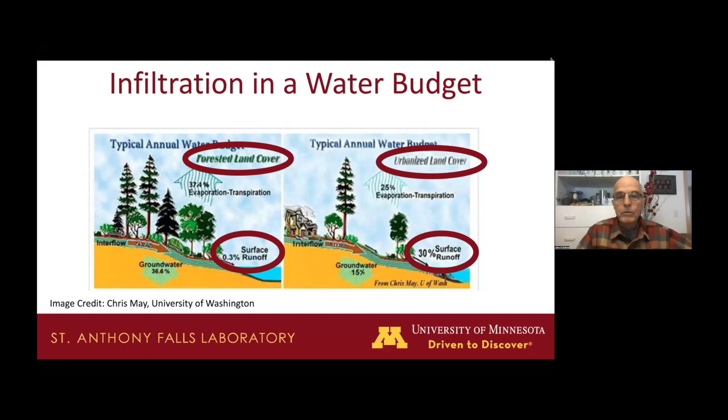So you have 30% surface runoff with an impervious and urbanized land cover. That's a factor of 100 difference from a forested land cover to an urbanized land cover. That's the source of our problems in managing these types of things.

So what can infiltration do for us? Well, the first thing it can do is reduce combined sewer overflows. It's not a big problem in Minnesota, but it is a big problem in many cities in the United States, especially towards the East Coast.

A big problem in Minnesota, because we have so many lakes, is we also have pollutant loads to these lakes. Lakes sitting there, it has pollutant load coming in. We need to take care of that pollutant load going to our lakes and our rivers. It reduces the pollutant load because it reduces the water and the concentration that comes with it.

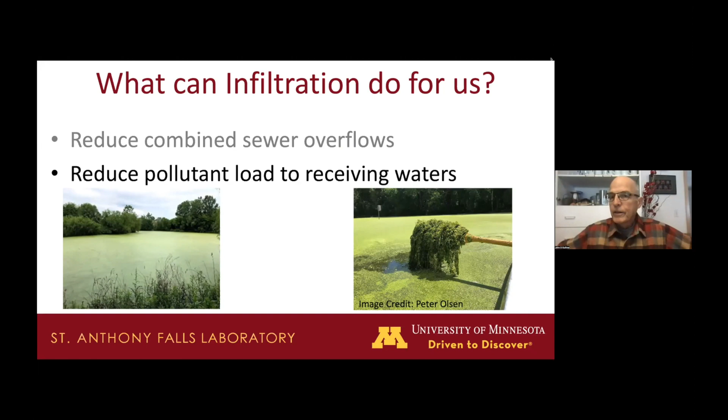A third impact is you can reduce the impact of extreme precipitation events. I did a research study with Trisha Moore and found that increasing infiltration practices reduce climate change adaptation costs by 50%. The reason for that is you can put in a lot of surface infiltration practices

instead of going underground, which is very expensive. If you're going to have pipe upsizing or underground storage chambers, that costs a lot of money. You can do a lot of surface infiltration instead.

But there are caveats to building infiltration practices. The main caveat is roughly 30% of infiltration practices fail on day one. That's kind of the history of infiltration practices.

The reason is a lack of infiltration measurements. People put something in and assume that it's going to infiltrate. There is construction compaction, which can stop infiltration, basically stop it, and plants that don't grow.

The plants open up the pores. Construction practices, construction compaction closes the pores. It makes a heck of a difference.

So the question is, can you use soil texture tables to decide - if you take a borehole and see what's down there - can you use soil texture tables to decide whether or not you can infiltrate water? The problem with soil texture tables is they don't talk about soil structure.

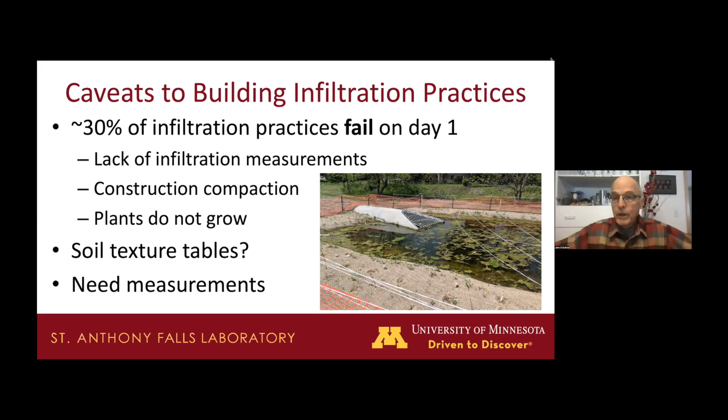So how do you determine infiltration? Well, the most important soil parameter for infiltration rates is saturated hydraulic conductivity.

We have a graph here on the right, infiltration rate versus time. The time could be minutes if you have sand or sandy loam, or hours if you have clay. You start with a high infiltration rate at time 0, but it goes fairly quickly down to something that's close to your saturated hydraulic conductivity. So it does set a minimum for your infiltration rate.

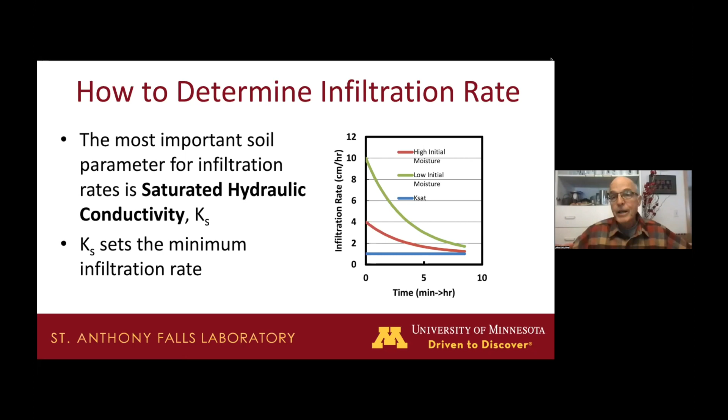I'm going to talk about 3 measurement techniques. We've been working on these measurement techniques for 20 years. We've recently been comparing them in a project for the city of Minneapolis.

The first is water level measurements after precipitation events. It sounds like a natural. It rains, you see how it fills up, and you see how fast the water disappears. Pretty simple, except it ends up being complicated in practice. I'll show you that. The second is synthetic runoff testing.

I like synthetic runoff testing. You do it under dry conditions, controlled conditions. You watch the water drain. The third is point infiltration measurements with infiltrometers. I'll talk about that as well.

So for the city of Minneapolis, we're doing water level measurements after precipitation events. We're actually comparing these 3 techniques.

It costs about $5,000 per site, so you need a fairly large site to do this. The reason it costs $5,000 is you have high equipment costs. You have to leave the equipment in there. You have to know what the rainfall is. You have to leave the equipment on the site to get enough data so that you can analyze it. The equipment doesn't always work. Sometimes something goes out, misconnection of something, some sort of meter. So you have continuity issues because you don't have a full set of data.

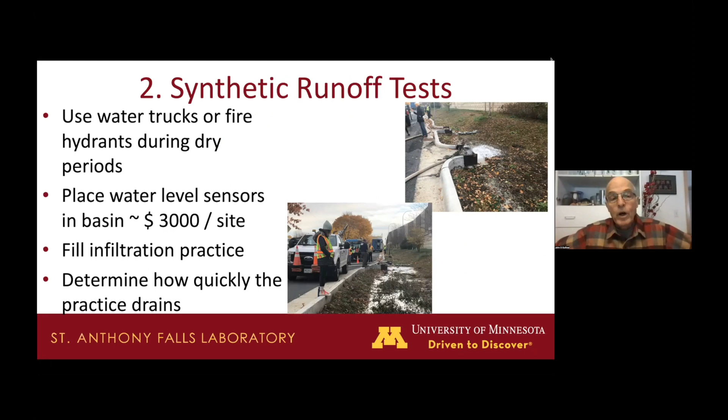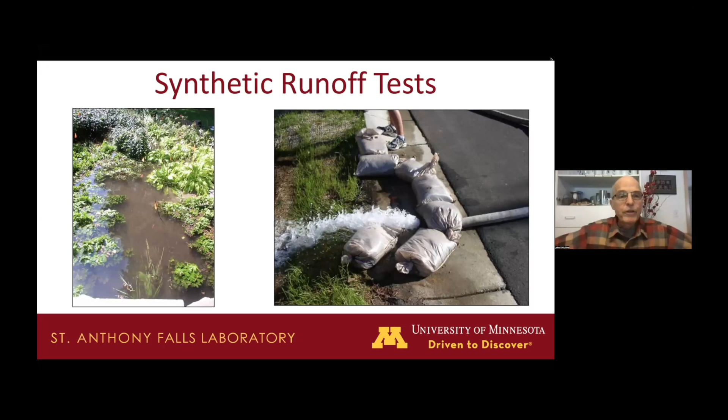Here's a synthetic runoff test at a rain garden that we did early on, 2005, I believe. We filled this rain garden and then watched it drain.

So if you want to know the saturated hydraulic conductivity, you can use this equation. It's mostly based upon the left-hand side of this equation, your original depth and your drainage time, but then the soil moisture and the soil suction comes into it right here. It has a certain impact.

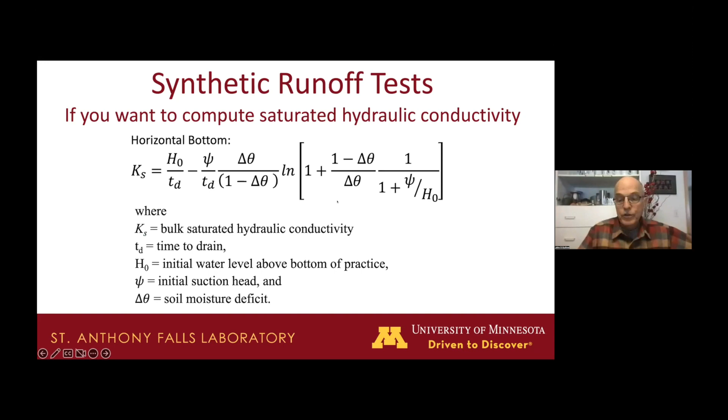The problem with synthetic runoff tests is that if you have too large of a practice, let's say a 10,000 square foot rain garden or a long swale, you can't get enough water to fill that up. It's difficult to find enough water. For example, the city will not let you run your fire hydrant for an hour because that is a problem for any fires that occur. Water trucks do not have that much water in them.

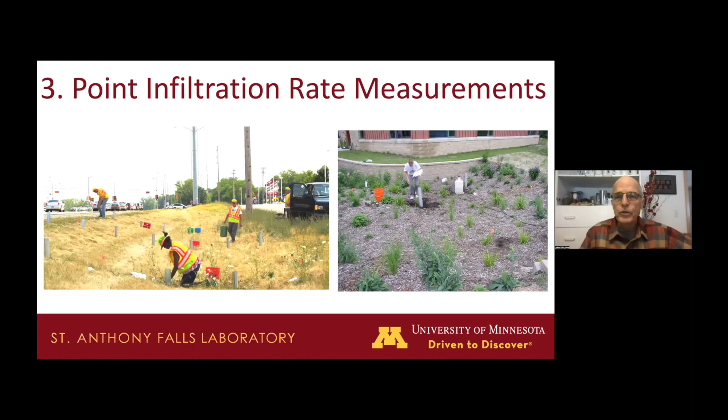Why do we take point measurements of infiltration rate? Well, that's the question. How many infiltration rate measurements do you need to take?

There are some studies that cover 2 to 2.5 orders of magnitude, which is still a lot. That means you need to take more than one measurement. If you take a measurement at one location and it happens to have a low infiltration rate, you'll assume you have no infiltration. If you take a measurement at a location with a high infiltration rate, you'll assume you have high infiltration. The truth is somewhere in between.

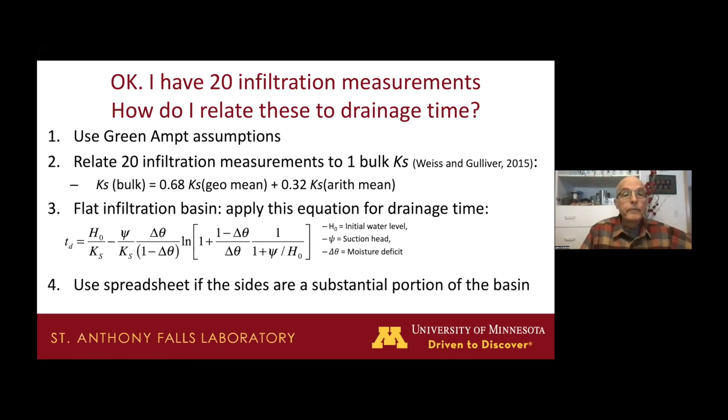So we've addressed the number of measurements. We found that it takes a lot more than we thought it would. That's why John and myself, along with Brooke Asleson and Rebecca Nestingen, developed the MPD, because we knew we had to take lots of measurements. And, you know, the double ring infiltrometer is a pain to use anyway. So you need approximately 10 to 20 infiltration measurements to characterize an infiltration practice.

The question is, how accurate are these things? How accurate are these infiltrometers?

So item 3B, is there bias in infiltration measurements? Again, there's the variability in the field. You cannot go in the field and determine the bias in infiltration measurements. We've thought about it, we've tried, it doesn't work.

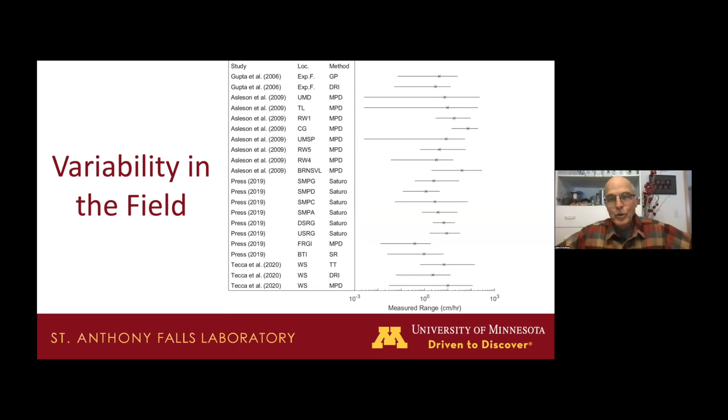So we did a numerical experiment on the computer. We take a soil identified with a certain hydraulic conductivity, certain soil parameters, a certain moisture, and put it into the computer. We supply our infiltrometer as it's used in the field, run the tests, and see how the measurement compares to the actual. So we have a measurement of infiltration rate with the infiltrometer, and we know the actual infiltration rate or actual saturated hydraulic conductivity in the soil.

We did this on 6 infiltration measurement methods, 7 soil types, and 5 antecedent soil moistures. So here are the 6.

A Turf-Tec infiltrometer is used at golf courses to see if they have to water. The modified Philip Dunne infiltrometer is something that we have worked on. The Saturo is a new infiltrometer developed by the METER Group in Washington. The double ring infiltrometer is the standard. The well permeameter is used to determine things like water reuse. And the pilot infiltration test is commonly used in Washington. It's actually a pretty large test.

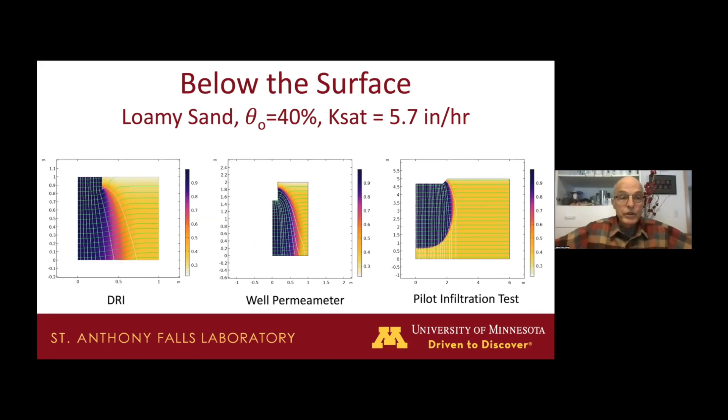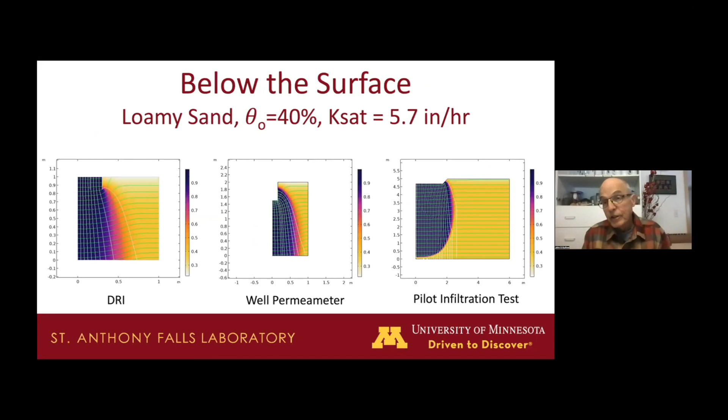So here's how they work on the computer. You can see these are the steady state techniques. They all assume a one-dimensional infiltration rate, but one-dimensional infiltration doesn't really seem to be happening here. It is two-dimensional, actually three-dimensional. The double ring infiltrometer, the well permeameter, and the pit test all have three-dimensional infiltration, but they all assume one-dimensional infiltration, so they should have some bias.

Here's what they look like after 6 hours, which is how long you're supposed to run these, 6 hours.

John, my apologies for the interruption. About 3 minutes, please. Okay, thank you.

I'm just about done. And this is what the other techniques look like: the Turf-Tec, the MPD Infiltrometer, and the Saturo.

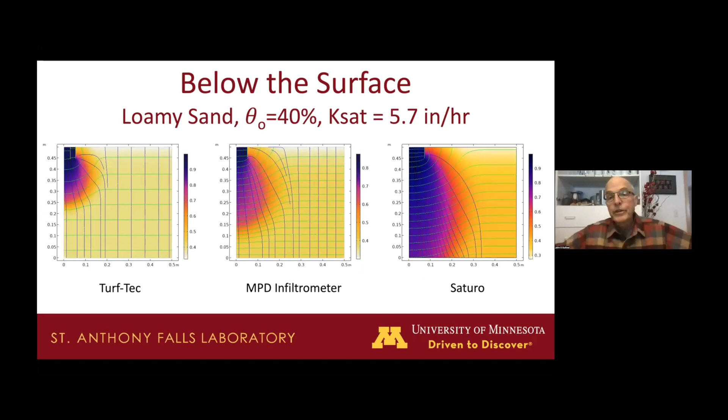So a summary of the measurements. A Ks measurement does not depend upon soil moisture. This is a good thing. If you have wet soil or dry soil, you get the same saturated hydraulic conductivity for all of the infiltrometers, except for tight soils like silty clay and sandy clay. There is bias, but it tends to be constant, meaning each infiltrometer has a certain bias. The exception is the Turf-Tec device, which doesn't really do that much in terms of the soil. It is really not accurate. We don't recommend it.

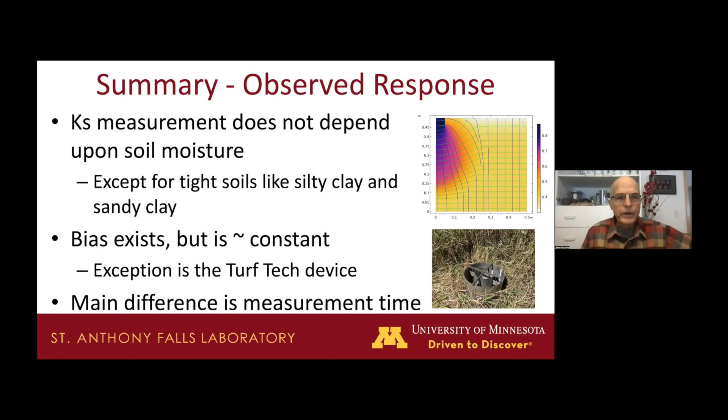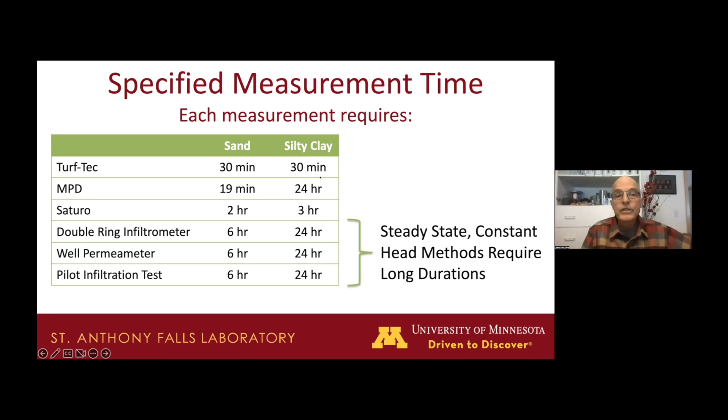The difference is how long it takes to measure. The falling head techniques are the first 3 here: the Turf-Tec, MPD, and Saturo. The double ring infiltrometer, well permeameter, and pilot infiltration tests are steady state techniques. You have to wait at least 6 hours to get steady state; that's the requirement. These 3 here can be as low as 30 minutes, 19 minutes, and 2 hours. For most of our infiltration practices, that's pretty close. If you go to the clays, then they can take longer, especially the MPD.

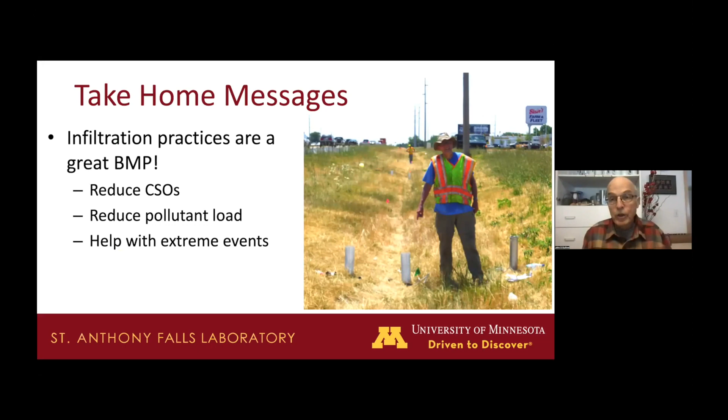So some take-home messages. Infiltration practices are a great BMP because they can reduce combined sewer overflows. They reduce pollutant load to your receiving water bodies, and they actually help with extreme events. But we need to measure the infiltration. We can't just take it off of a soil texture chart, because soil texture is only part of what causes a rapid or slow infiltration. And there's roughly a 30% failure rate due to poor infiltration, which was uncharacterized.

So synthetic runoff tests, I like those the best. They're the most accurate, and they are relatively inexpensive. If you cannot do synthetic runoff tests, then you need to measure infiltration with point measurements. To get within a factor of 2, you need 20 measurements; for a factor of 3, 10 measurements. It depends upon how important it is for you to get accurate infiltration measurements.

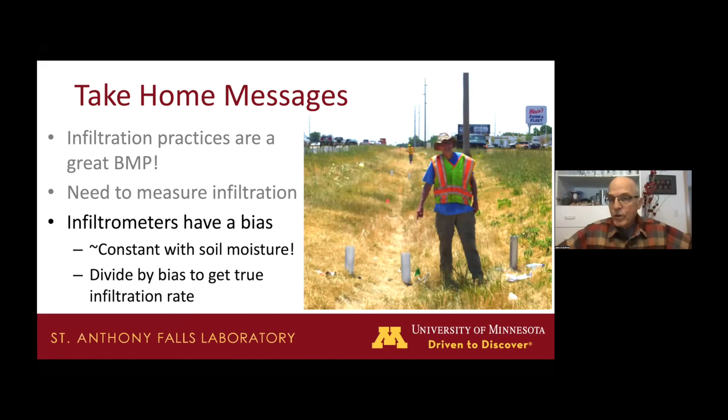Infiltrometers have a bias, but we figured that out. It's constant with soil moisture. It doesn't change when you change your soil, and you just divide by the bias to get your true saturated hydraulic conductivity and get your true infiltration rate. And we recommend the Saturo and the MPD because they take less water, less time, quick installation, and you can take lots of measurements. So that's my talk.

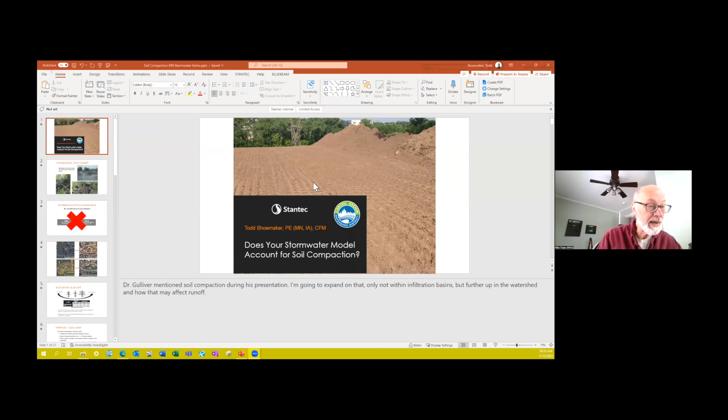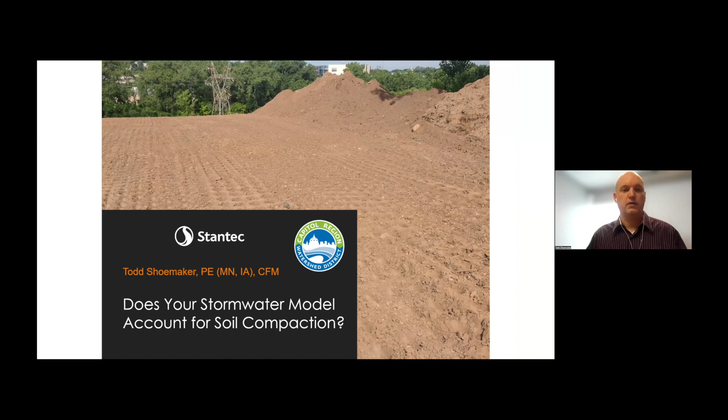Dr. Gulliver just mentioned soil compaction during his presentation, so I'm going to expand on that a little bit, not only within infiltration basins, but further up in the watershed and how that may affect runoff. Accurately determining post-construction runoff is critical to long-term watershed management. Increased runoff rates and volumes lead to incised streams, more sediment in the water column, and increased localized flooding. If we don't accurately predict runoff, we can't properly size downstream mitigation measures.

So let's talk a little bit about modeling and computer modeling, or as some of us like to call it, the curve number game. Curve number method is from the NRCS, and it's a widely accepted method for calculating runoff. It includes relatively simple equations used to calculate the amount of runoff from a rainfall event. Curve numbers range from 30 to 100, with larger numbers indicating a larger runoff potential. The lower the curve number, the more permeable the soil is.

And curve numbers are assigned based on soil properties and then classified into what are called hydrologic soil groups. There's A through D. So A are sands, and they represent a lower CN or less runoff. And then hydrologic soil group D are generally clays, and they have a higher curve number or more runoff.

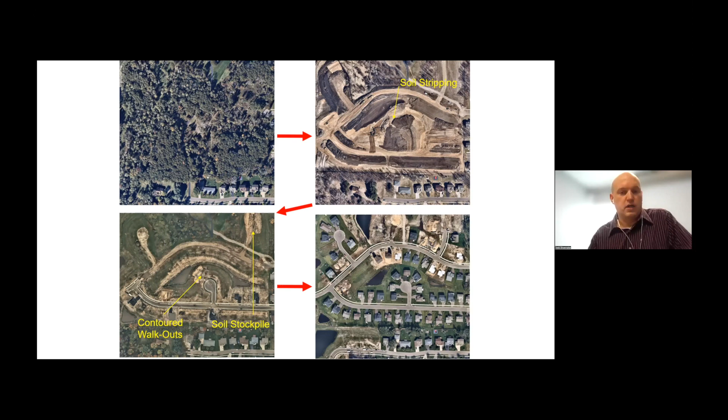This is a subdivision that went from undeveloped in 2016 through near completion in 2019. It's generally accepted that construction activity reduces the amount of topsoil via stripping and export and increases soil compaction by grading and stockpiling. This leads to increases in soil bulk density and decreases in the effective soil porosity. These changes to the soil properties then increase runoff rates and volumes. However, the amount of compaction that has occurred during this time and the corresponding change in runoff is not widely understood.

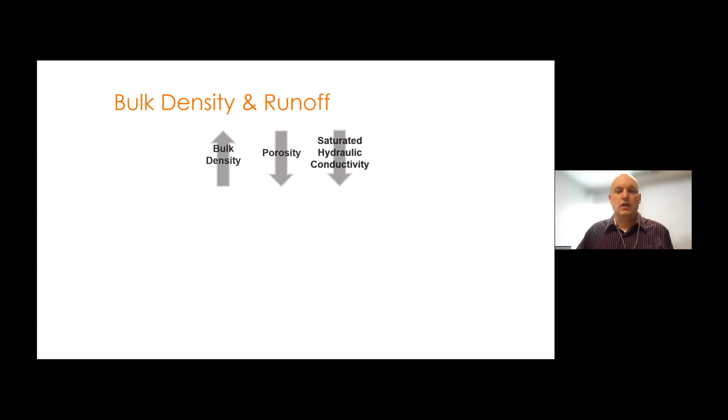So we started with the Minnesota Stormwater Manual. The manual does a good job of explaining soil compaction in terms of bulk density, but we hit a roadblock as we were unable to correlate the increase in bulk density, the decrease in porosity, to an increase in curve number or an increase in runoff. Therefore, we shifted our focus to how those may affect the saturated hydraulic conductivity and how that changes due to construction compaction.

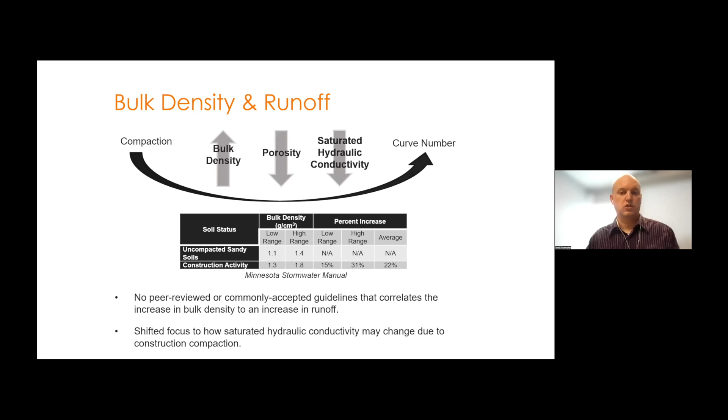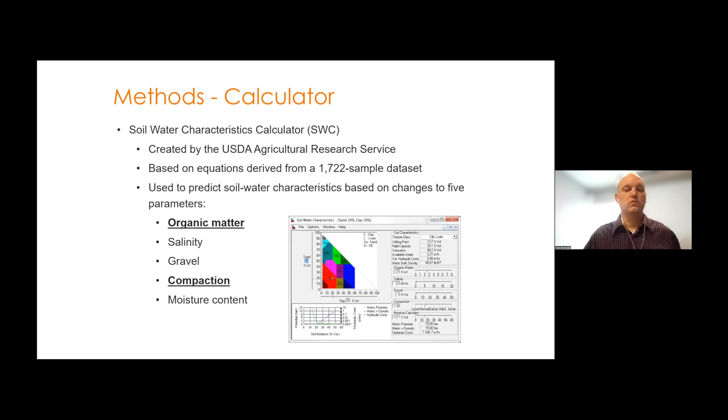This led us to the soil water characteristics calculator; USDA Agricultural Research Service created this calculator. And that's based on an equation derived from a 1,700 sample data set. It predicts soil characteristics based on these 5 parameters listed on the screen. The 2 that are underlined, organic matter and compaction, we underline those because those are the 2 main parameters affected by construction activity.

So for a pre-development or the uncompacted condition, we use the calculator's default values to obtain saturated hydraulic conductivity for the 12 soil textures shown in the triangle. We then correlated that saturated hydraulic conductivity for those soil textures to the appropriate hydrologic soil group using the National Engineering Handbook.

For the post-construction condition, we chose to simulate a moderate increase in compaction by going from normal to dense conditions. You can see in the list there that there's actually 5 compaction options. So we approached it from, at least our perspective, a reasonable increase going from normal to dense. Just that one change from normal to dense gave us some pretty significant impacts on infiltration. So we didn't want to go overboard to go up to hard or severe, but just be aware that there are even more hard or severe conditions than what we selected.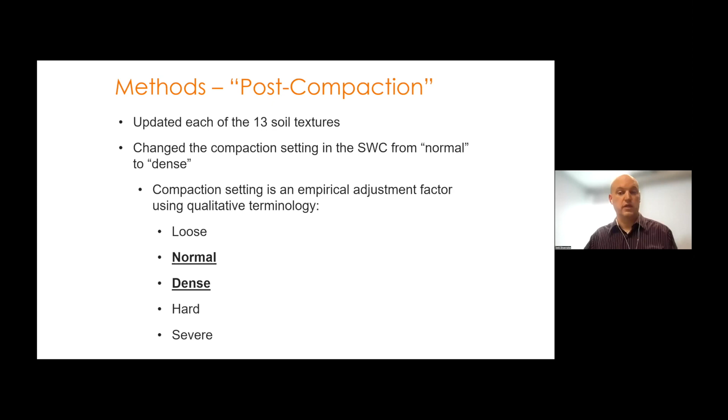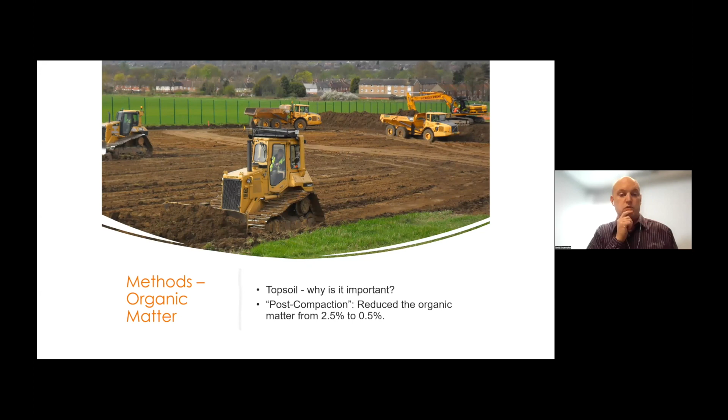As I said earlier, many construction projects involve stripping, stockpiling, and replacing topsoil. This is important because topsoil contains most of the organic matter in a soil profile, and each of these construction activities reduce the overall amount of organic matter. So for our evaluation, if you recall back to that screen grab from the soil water calculator, the default is 2.5%. We reduced that by 2% based on input from some soil scientists in our office.

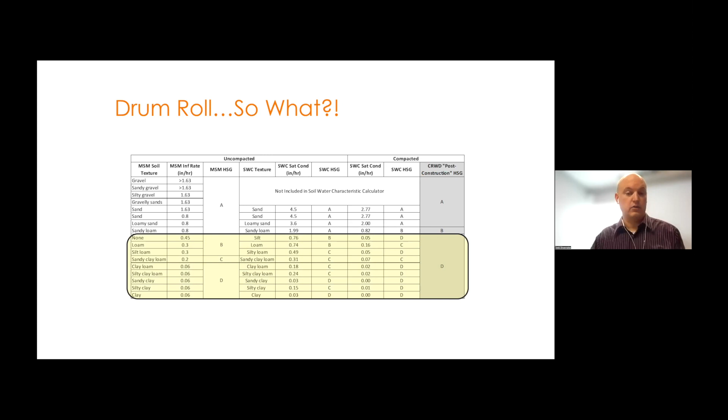For about the bottom half of this table, those are B, C, and D soils in the uncompacted condition. But then when construction activity occurs, the decrease in saturated conductivity is quite severe. So those should actually be modeled, or they're acting as a type D soil.

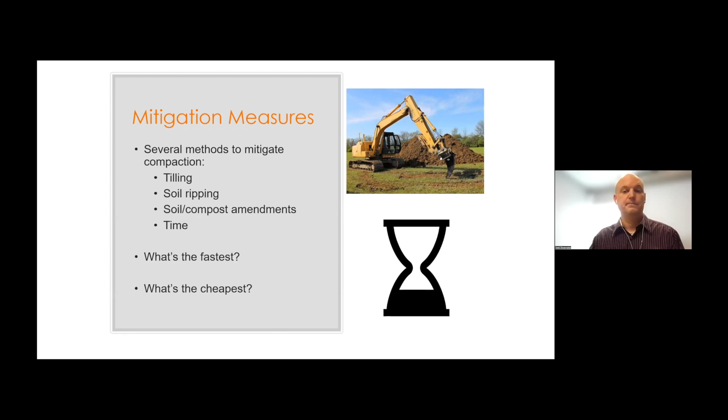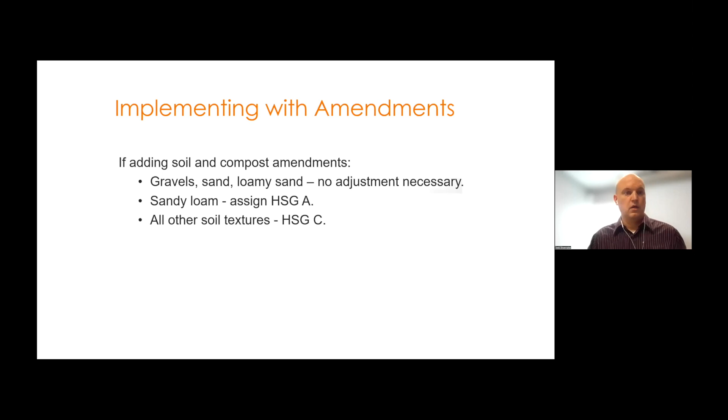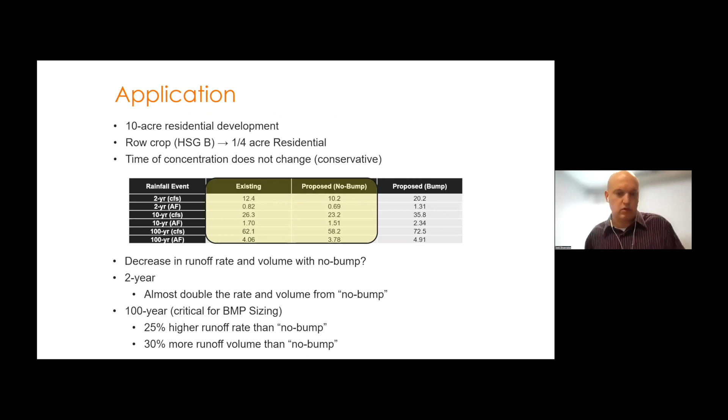Let me conclude here real quick with a theoretical application. Let's consider a 10-acre residential development, type B soil. It's going from row crop to residential. For simplicity, let's just assume the time of concentration doesn't change. What you'll see in the table there is this curve number adjustment. I guess we kind of affectionately refer to it as the no bump, where you just keep the soil groups the same, or a bump where you actually change or adjust that soil group. So what you see there going from existing to proposed is that there's actually a decrease in the runoff rate and volume.

When you look at the 2-year storm event, though, start comparing existing to proposed. For the 2-year, you have almost double the rate and volume when you're comparing the bump and the no bump situations. This is important because a lot of times that 2-year storm event is closely related to the channel protection volume or protecting downstream creeks and waterways. So if we think that we're managing our water well enough to protect from downstream erosion, but actually there's more water coming through the system, we may not actually be accomplishing that protection.

Similarly, if we look at the 100-year, those rates and volumes are higher, as we would expect, compared to without the bump. And this is critical because a lot of our ponds and basins get designed to manage up to the 100-year storm event. Not only may the pond start overflowing more frequently, but also low floor elevations are a lot of times assigned based on that high water level. So if the high water level calculated might be a little low, then we might start having more impacts to low floor elevations. Sorry for the interruption, but if you could, wrap up, thanks.

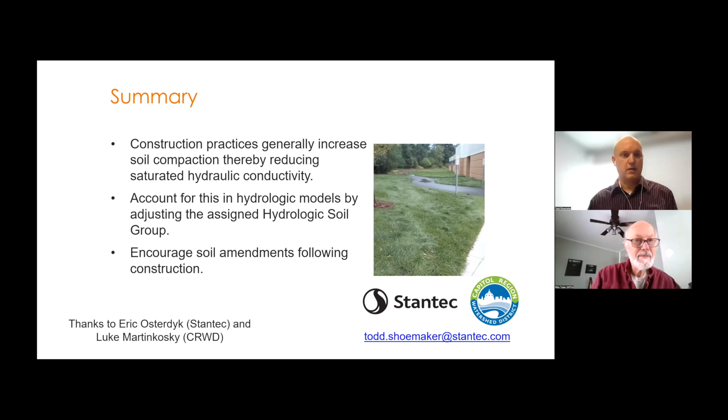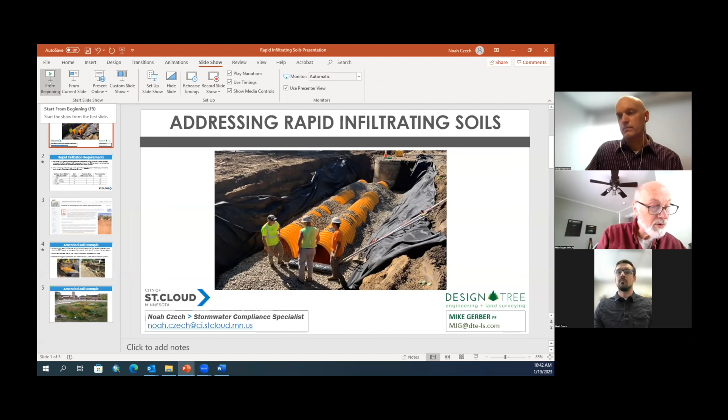Our next presentation is on the topic of addressing rapid infiltrating soils, and we will have 2 presenters splitting this one, Noah Czech and Mike Gerber. Noah has been the City of St. Cloud Stormwater Compliance Specialist for 15 years. He oversees implementation of the city's stormwater pollution prevention program and surface water management plan. He's worked on implementing numerous water quality improvement projects and oversees the city's stormwater inspection and maintenance program.

Mike Gerber is a civil engineer who works at Design Tree Engineering and Land Surveying, a multidisciplinary consulting firm. He currently is a project manager who also designs and drafts a variety of different projects. Mike designs stormwater management practices and has dealt with a number of projects where infiltration rates are higher than the rate designated by the regulating agency, the Minnesota Pollution Control Agency. So I'll let the 2 of you take it over, and Noah, I believe you're up first.

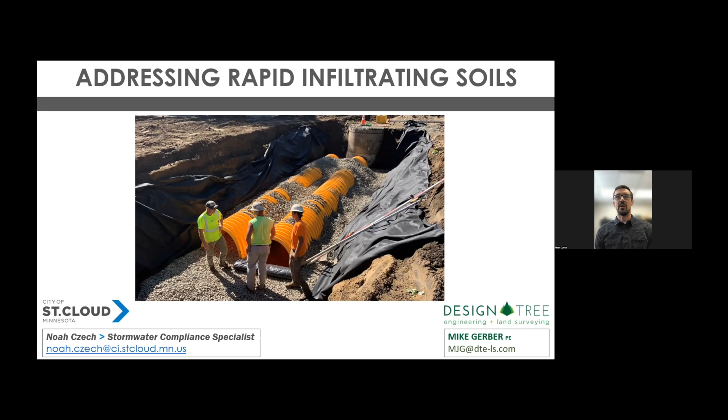Yeah, thanks, Mike. Mike Gerber and I will be talking about how we have addressed rapid infiltrating soils. I'll be coming at it a little bit more from the regulatory perspective as a city, and also the implementation side on city projects. And Mike will dive a little bit further into how he handles things on the private consultant end, working with private property owners and communicating those regulatory requirements between the owners and contractors.

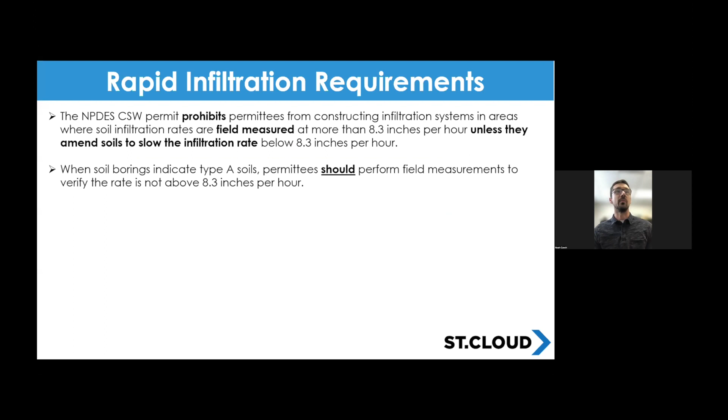The state construction stormwater permit in Minnesota prohibits us from constructing infiltration systems in areas where infiltration rates are field measured at more than 8.3 inches per hour, unless the soils are amended. So if we test and are above 8.3 inches an hour, we're either not infiltrating that location or amending those soils to get below 8.3 inches per hour. The permit also states when soil borings indicate type A soils that we should perform these field measurements to verify the rate is not above 8.3 inches an hour.

So in St. Cloud, we've been implementing for about the last 5 years the following table for soil borings and infiltration testing in proposed infiltration treatment practice locations. This is occurring pre-permit approval to confirm soil types and infiltration rates. The reason we started implementing this was because we were having issues with projects at the design phase just using soil borings as an indicator, and during construction our sites were not infiltrating as we thought. They were actually infiltrating slower and failing in that aspect.

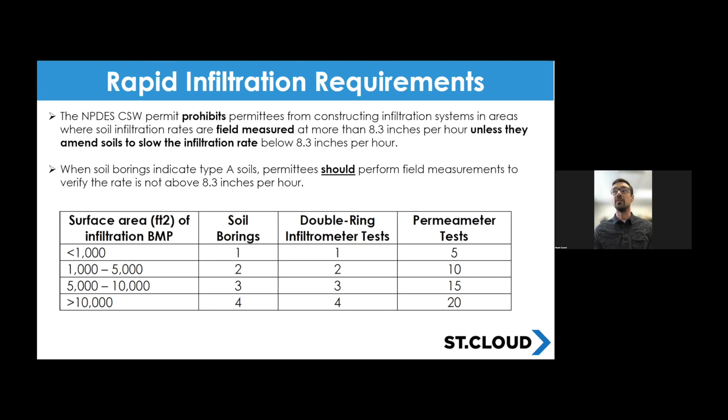So we implemented this requirement to help with that, which it has, but it had the flip side effect that now we know which sites are field measured at 8.3 inches or above, and thus have to amend the soils. In St. Cloud, we have lots of rapid infiltrating, sandy soils, so this has been something we've had to deal with.

So where did we start? Of course, the Minnesota Stormwater Manual has excellent guidance, a framework and a process of where do you start, what are some options, what are some tools, and how do you approach this once you know you're above 8.3 inches an hour infiltration rate in an infiltration system area.

So an example project of the city, a neighborhood street reconstruction project, proposed to install several underground infiltration chamber systems where we had rapid infiltrating soils well above 8.3 inches an hour. What we did is we took out those rapid infiltrating soils underneath the practice and mixed them with other on-site silty sands to make a dirty sand and slow that rate down. We didn't use MnDOT topsoil or compost, which is one option in the Stormwater Manual. We felt this was the best approach.

We mixed on the side of the trench, not right in the trench below the chamber system, a scoop at a time, for lack of a better way, till it passed our eyeball test. Do you think it's going to be lower than that 8.3? We then tested the mix with another infiltration test to confirm that we slowed that rate down, but we shot for the high end.

We wanted to stay more on the high end before we then installed this under the treatment system, I think at about a 12-inch depth on this project.

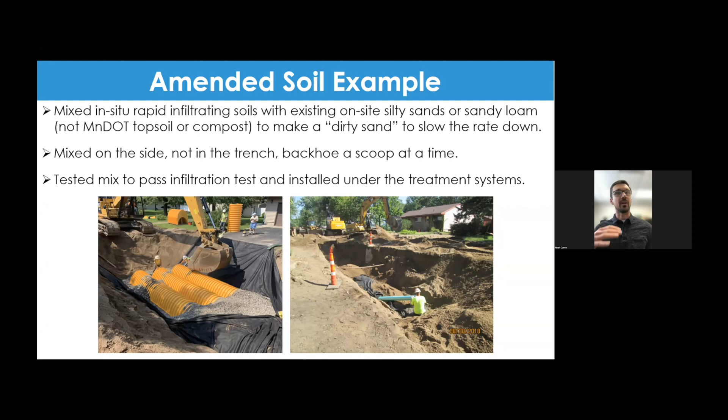One more real quick example, somewhat of a similar approach, but different on surface infiltrating practices, like an infiltration basin or rain garden. What we've done is we've replaced the rapid infiltrating soils with about a 12 to 18-inch depth of one of the soil mixes from the Minnesota Stormwater Manual, to address not only the rapid infiltrating soils that were maybe above the 8.3 inches an hour, but also promote that plant growth and pollutant capture.

With that, I'll turn it over here to Mike Gerber to chat about his perspective on dealing with rapid infiltrating soils from the private end of things and his work.

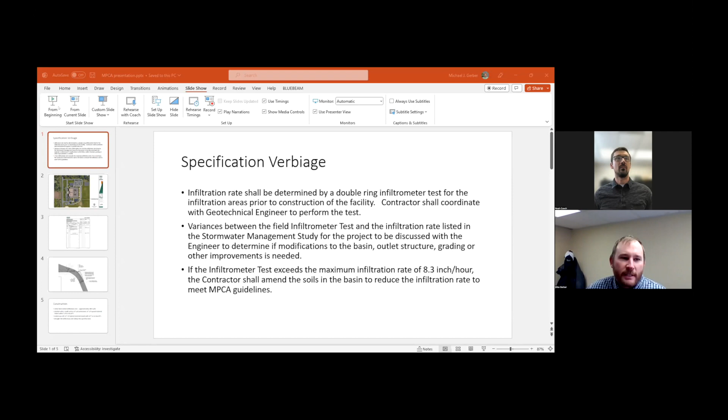Yeah, appreciate it all. So I'm going to use a case study from a project that we did in St. Cloud as an example for this. And I'm going to start with the specification verbiage. We really only include these 3 bullet points in our specifications regarding infiltration rates. The first one is that the infiltration rates shall be determined by a double ring infiltrometer.

The second is any variances need to be brought up to the engineer, so that if any modifications to any of the BMPs need to be made, we can make those adjustments. And the third is regarding the maximum infiltration value. And we purposely leave these vague for a reason that I will get to as we go through the example. So this example is a parking lot reconstruction project.

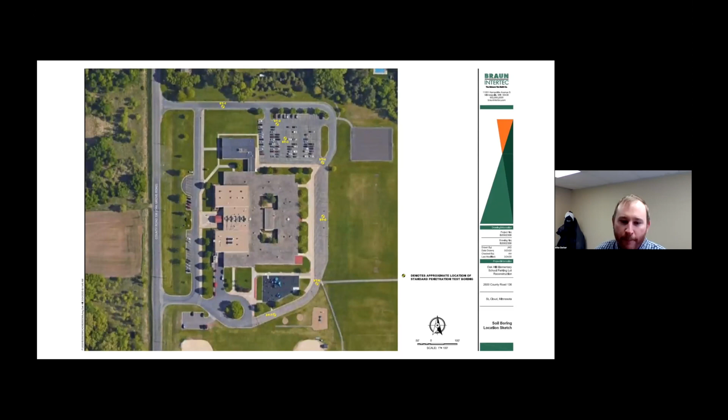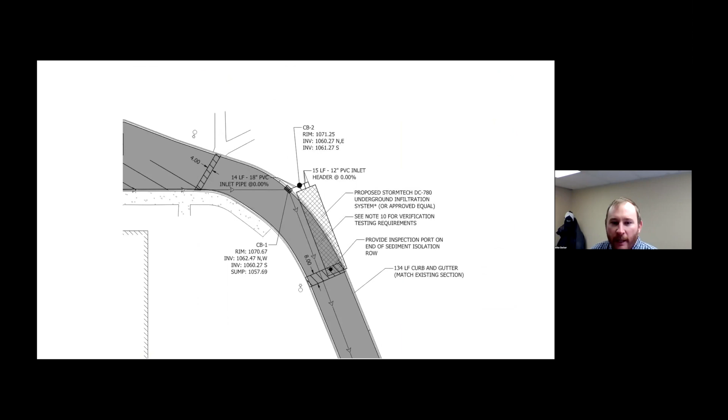But we proposed this offline underground infiltration system. And once we got into construction, the initial field tested infiltration rates were about 100 inches per hour. And what we did was we just had the geotechnical consultant start with their double ring. And once it was apparent that it wasn't going to meet our specification, we had them stop.

And we started with just a small section of soil corrections. We actually did it in the trench, and we did 6 inches of topsoil that was available on the site with 6 inches of the in situ SPs, and they just bucket blended it down in the trench, and that got us down into about the 50 inches per hour range. So we ended up going with 12 inches of topsoil material mixed in with 12 inches of the in situ sands. And this brought the infiltration rate down to the specified rate.

And the reason we used the topsoil mixture on the site was because it was sandy, and it was really the only material that was readily available. So that's a big piece of it. And that's why we leave our specs vague, and we just communicate with the owner up front that this could be a possibility, but there's really no way to plan it until we have our tested values. So it's a function of material availability and the risk versus cost analysis and how we go with this.

But as we do more projects, we're able to get a little bit more knowledge of what depth of what certain types of media that we need to blend. And that's how we approach projects. And it's a big communication exercise and coordination between the owner, the consultant, and the contractor. So that is all that I have for my example. I'll pass it back to Mike.

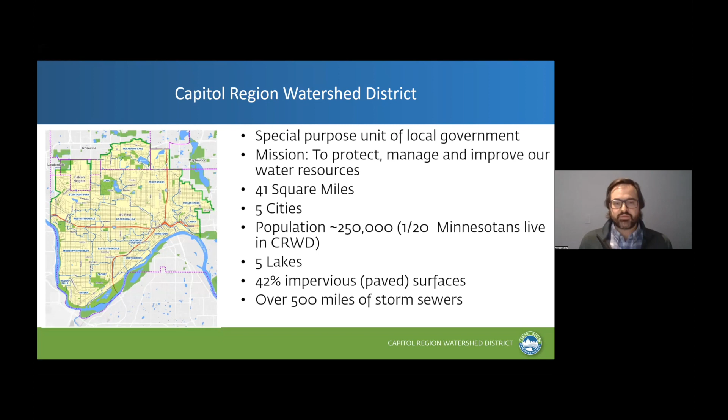We've got 5 lakes, and 42% of our area is impervious surface, making us the most highly urbanized watershed district in the state. So back in 2016, Capitol Region purchased the former McQueen equipment property to repurpose it as our new office. We set some goals of creating a sustainable workplace to conserve natural resources, practice what we preach in protecting water resources, and really create a demonstration piece for the public to come in, engage with stormwater education and the natural and built environment.

So we hired MSR Design and EOR on the architect and civil side of things, and we set some high goals of having a variety of stormwater practices that you see here. These are all the practices that were implemented, and we also set ourselves a goal of trying to achieve our regulatory standard, even though for this portion of the project we were not required by the city, NPDES, or our own rules to do that.

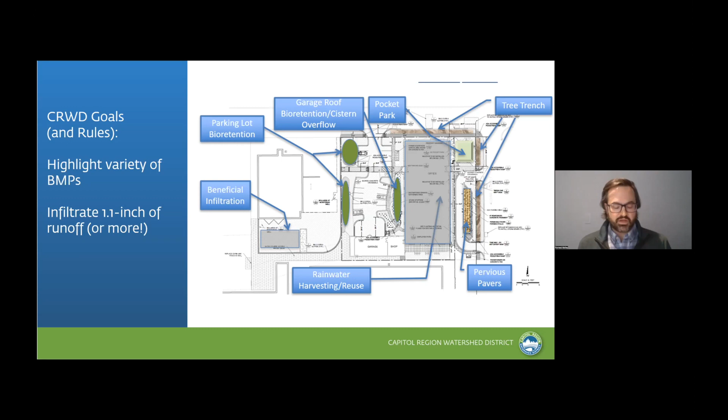We wanted to treat the 1.1 inch, and we were actually able to achieve over the entire site, which includes 2 parcels and 2 buildings, about 2.5 inches of infiltration storage. However, we knew going into this that we might come across some issues, and indeed, some issues were identified that made infiltration initially deemed infeasible.

So we engaged Barr Engineering to work with us on the environmental engineering side of things and create a response action plan for construction. During that analysis, it was identified that the building had asbestos, lead, there were solvents underneath the slab, so there are vapor concerns. And then what we're going to focus on today is previous tank releases from some underground storage tanks that impacted the soil and the groundwater.

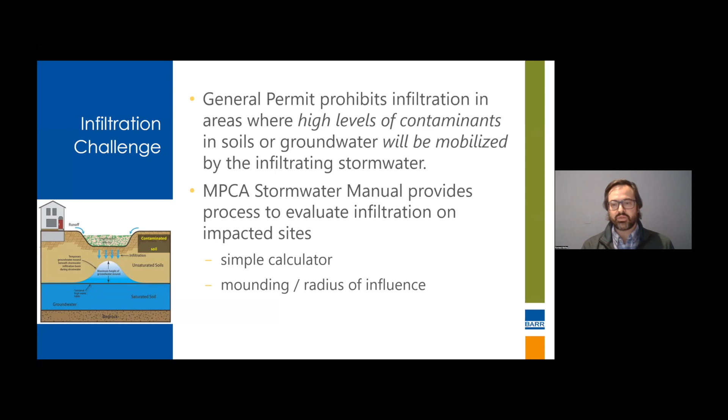So the general permit does say that infiltration is prohibited where high levels of contaminants in soils or groundwater will be mobilized by infiltrating that stormwater. There is a guidance tool to try to provide some direction, but we took it a step further with engaging Barr. And then we were really posed with the question, what should we do?

We really wanted to try to provide some infiltration on the site. Typically, if there's a site with contamination that goes through our permitting process, they're jumped into alternative compliance sequencing, where we're utilizing lined filtration systems, whether it's bioretention or underground or manufactured treatment devices. But we started thinking, well, what if we infiltrated relatively clean stormwater into the groundwater? What would that look like? Would it be beneficial for the groundwater in that area?

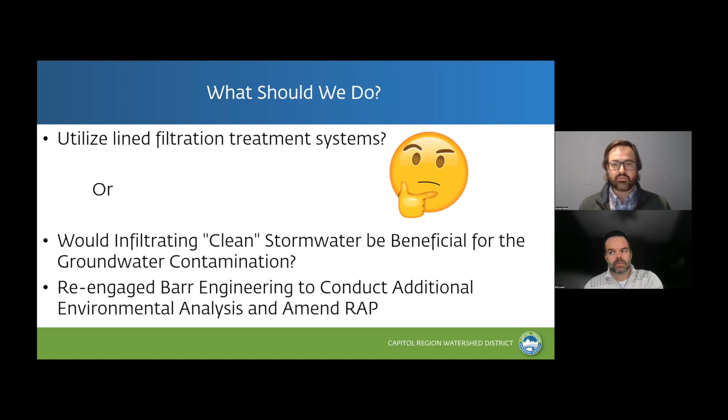So at that point, we took that question to Barr Engineering and re-engaged them to conduct additional analysis and amend our response action plan with the MPCA. So with that, I will engage Eric for the rest of the presentation.

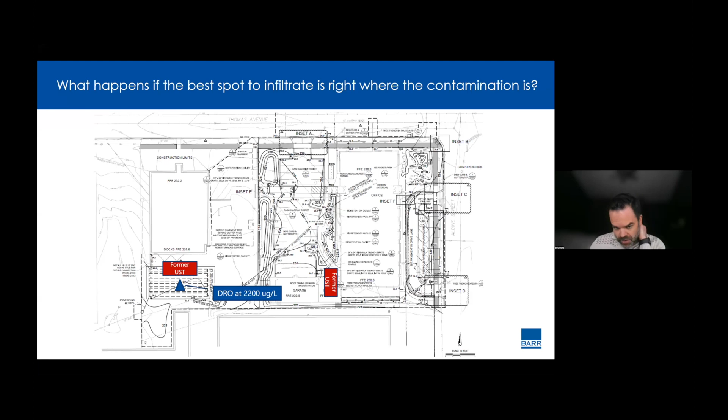In this situation, MPCA would typically suggest you can either move the feature, modify the feature, or model and demonstrate that there's not going to be a negative impact. That's the route that Cap Region wanted to go.

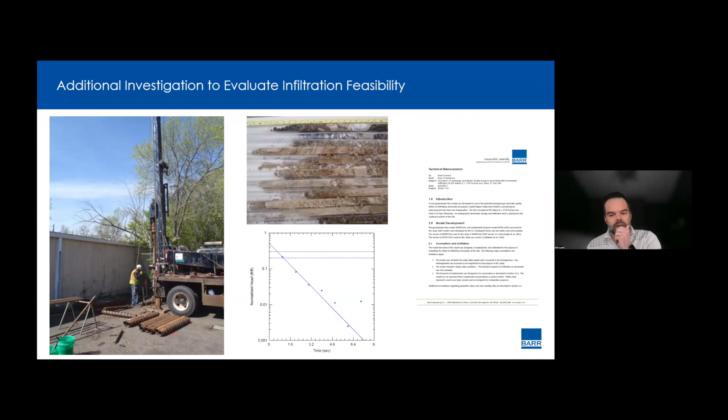So we installed 4 permanent monitoring wells. We collected soil and groundwater samples to better characterize the geologic and hydrogeologic conditions and the contaminant concentrations. We calculated hydraulic conductivities, and we did all this to construct a groundwater model that we could use to evaluate the impact of the infiltration.

Forrest alluded to the mounding calculator, the simplified approach MPCA includes in the Stormwater Manual, where you look at how high the groundwater table is going to rise as a result of infiltrating stormwater, and whether it has the chance to intersect with contaminated soils or groundwater, all for the purpose of not making an existing condition worse.

So we said this is a positive; we're not intersecting some existing contamination. Groundwater here is down at about 35 to 40 feet, so we're below these former tank basins. We thought that was a good outcome.

We'll look at the second piece that we used our model for, which was the contamination transport. A lot going on this slide, but the left-hand side is existing conditions and the right-hand side is modeled future conditions. We modeled petroleum contamination conservatively as benzene to use some of those transport mechanisms.

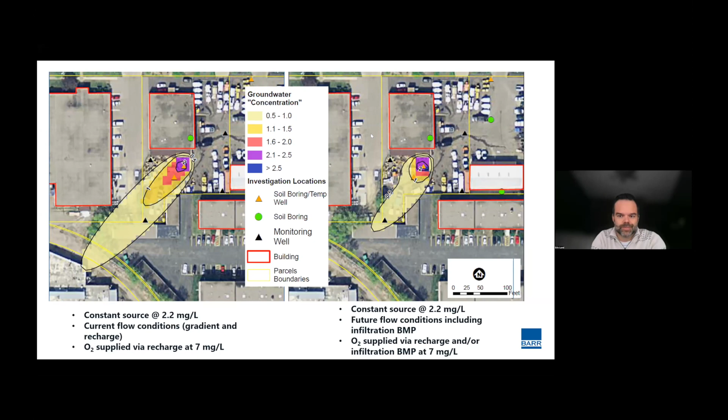So then we looked at, on the right-hand side, what if we increased that recharge rate via infiltration and supplied oxygen-rich stormwater? Does that actually potentially have the effect of improving the contaminant condition? The model would suggest that it does. By adding that extra oxygen, we can basically start aerobic degradation or enhance it, and we show the benzene plume shrinking in this scenario.

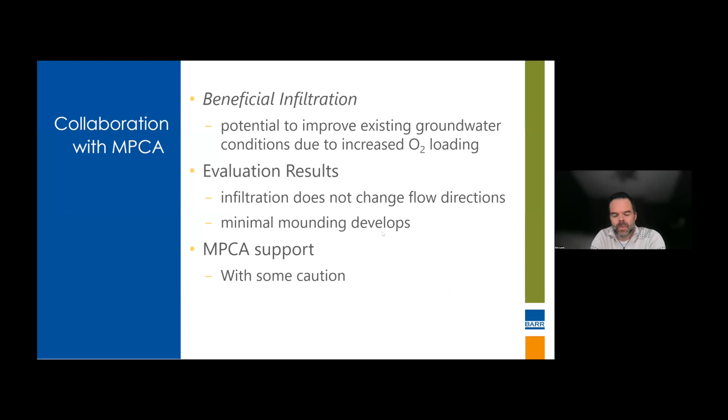We continued our collaboration with MPCA, started using this term 'beneficial infiltration' - the potential to improve the condition because of increased loading. Our model suggested that infiltration doesn't change the flow direction, and a minimal mound develops. We had general MPCA support with some caution, because there are other sites in the area - a down gradient Superfund site - and you need to consider associating yourself with other contaminants.

So we installed the feature during construction. We ran into some additional contaminated soil and additional storage tanks, but things that we were able to deal with.

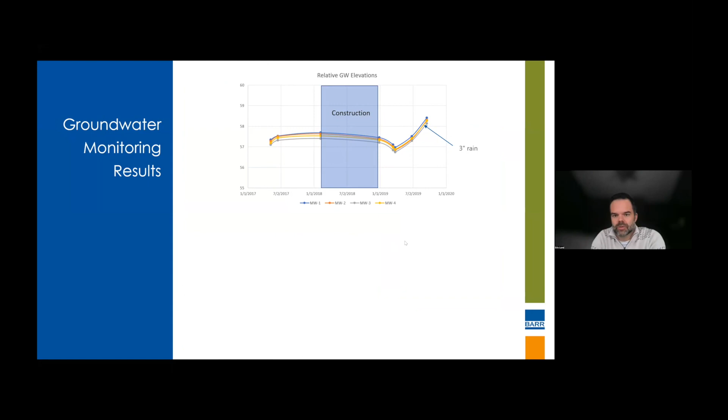Then we started a monitoring phase. The first image here is relative groundwater elevations. What we discovered was the general direction of flow from northeast to southwest didn't change. We didn't observe a large mound beneath the infiltration practice. The groundwater table fluctuates with precipitation, as you might suspect, which kind of confirmed our model.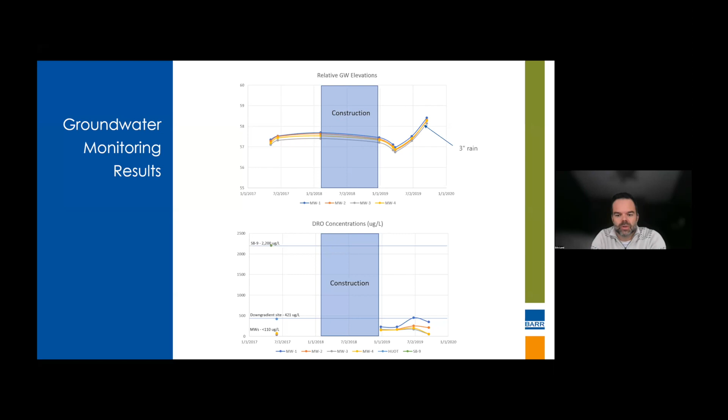We looked at the contaminant side as well, how the petroleum concentrations changed potentially as a result of the infiltration. We observed some initial relatively small increases. We have some theories about that being potentially related to stirring up some of that impacted soil during construction or fresh paving. We saw those come back down, and they weren't at a level of concern that made us worried about the impact we were having, and they're much lower than we observed in that initial tank basin sample.

So what we learned was, there wasn't a change to the flow direction. We didn't observe a large mound. We saw some minor increases in petroleum concentrations initially, but subsequent reductions. We really viewed this as a successful infiltration on a contaminated site. From the regulatory side, the leak sites are closed.

MPCA accepted our response action implementation report, and so things are going well. They're in sort of operation mode now.

There is a bit of caution on the next slide. We talk about the risk not being zero. The type of contaminant and the concentrations really do matter. This is a relatively lightly contaminated site. Petroleum is a better contaminant, I guess, from this perspective than something like PFAS or a chlorinated compound that doesn't want to degrade as easily.

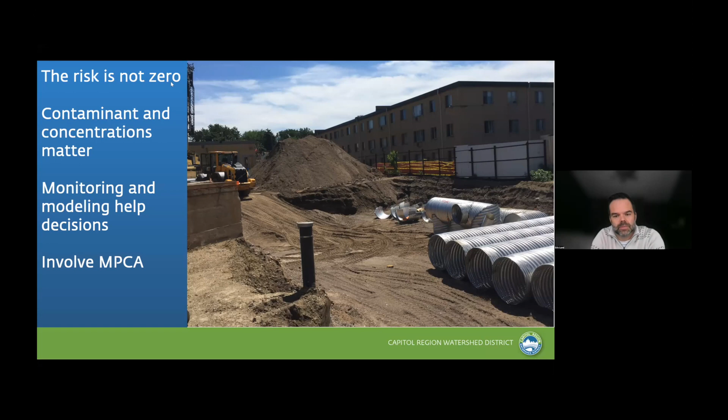Monitoring and modeling really are helpful in making these decisions as to the appropriateness and the risk management. MPCA involvement on our project was really key to give us the confidence that we could do this. I'll pass it back to Forrest for just a couple of images.

Thanks, Eric. So as Eric mentioned, we deem this a success, and overall we're really happy with the building and the stormwater practices that we've implemented here.

We moved in December of 2018. We are monitoring the underground infiltration system in the southwest corner of the property, and have observed no stormwater discharge from the area of the site that drains there.

In 2023, we're going to re-engage Barr to help transfer the responsibility of monitoring over to our in-house monitoring staff, so we can continue to take samples from those wells and ensure we continue to have a benefit to the groundwater system, and are not moving plumes or adding pollutants to it.

So with that, I will say that while dilution may not be the solution to pollution, physical, chemical, and biological processes to reduce petroleum hydrocarbon pollution in local surficial groundwater may be the solution to the pollution. And that's all I got.

Thanks, Forrest and Eric.

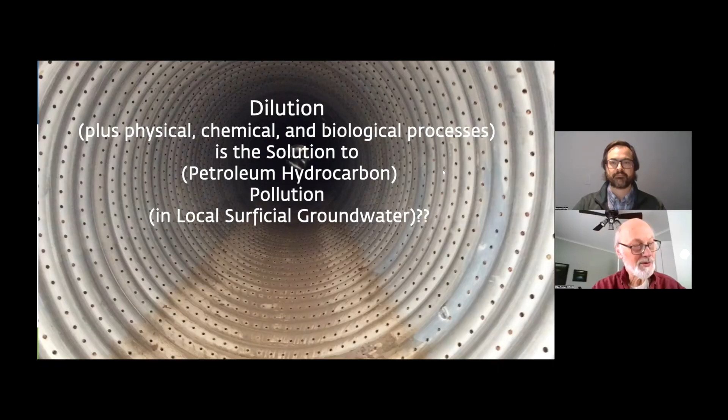Okay, saving the best for last. Well... John, you owe me a $10 bill for that.

Dr. John Nieber will be talking about potential groundwater impacts from stormwater infiltration.

Dr. Nieber is a native of upstate New York and received his BS in forest engineering at Syracuse, his MS in civil engineering at Cornell, and a PhD in agricultural engineering at Cornell. He joined the Department of Agricultural Engineering at Texas A&M in 1979, and in 1985 saw the light and came over to the University of Minnesota and joined the Department of Agricultural Engineering. In 1995, he was promoted to full professor. John's research interests involve hydrologic process discovery and modeling, with a particular interest in flow and transport processes in porous media. He is a member of the American Society of Agricultural and Biological Engineers, American Geophysical Union, Soil Science Society of America, and a certified professional hydrologist with the American Institute of Hydrology.

His current research involves studies on utilizing infiltration for stormwater control in urban areas, assessing best management practices' impacts on reduction of nitrate in groundwater, and combining hydrologic models with machine learning to quantify mass and energy transport processes in urban ecosystems. So with that, John, take it away.

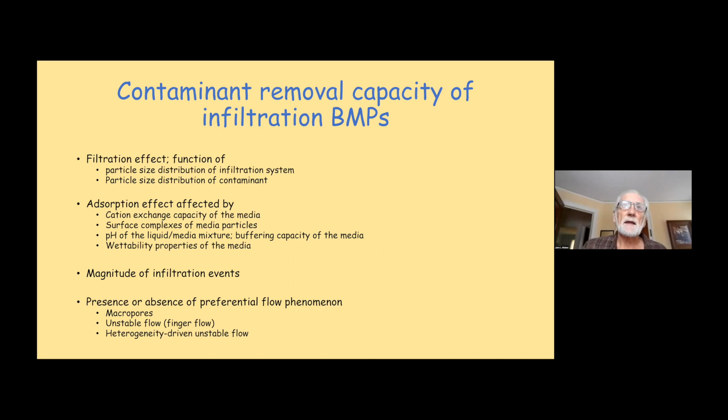That residence time influences the effectiveness of uptake of contaminants, and maybe adsorption or even biodegradation of contaminants. A really important factor is the presence or absence of preferential flow phenomena, such as macropores, unstable flows, finger flow as they might call it, in the porous material, or heterogeneity-driven flows that lead to unstable flow. So all these things are important factors, and I'm not going to get into the details of how to model any of these.

Those are things to be discussed at another time. But I'm going to talk about the monitoring that we did here in the Twin Cities metro area. And I will, as soon as my slide decides to move.

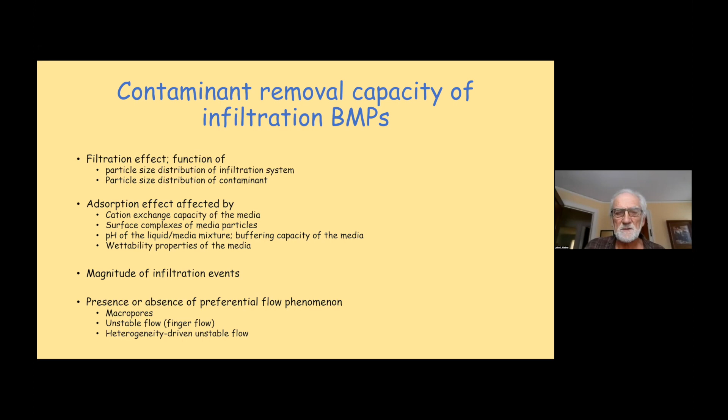Site A is the Hamline Midway rain garden—you can see it on the right-hand side, an aerial view of it. The zoo is located just to the right of where the rain garden is located. We put in sampling bottles, lysimeters, at this site to collect samples of runoff that's collected in the rain garden, and also to sample the water that's infiltrated into the profile. There's a cross-sectional view of these samplers. We had suction samplers and also open bottle samplers that allowed water to enter in, and we could take those samples and do analysis of them.

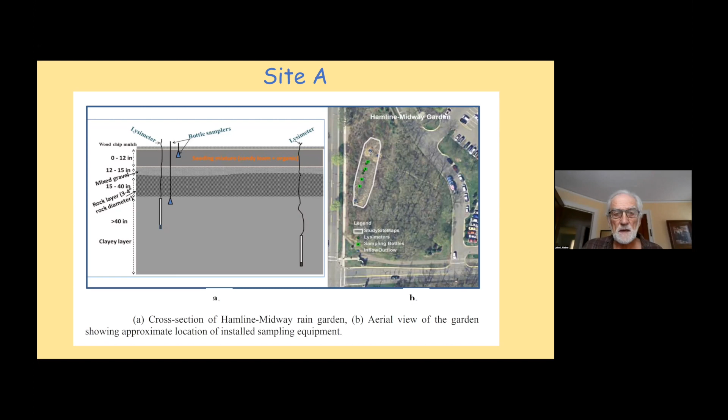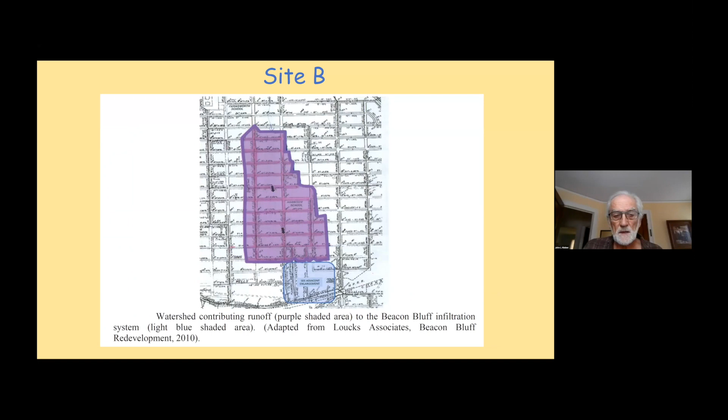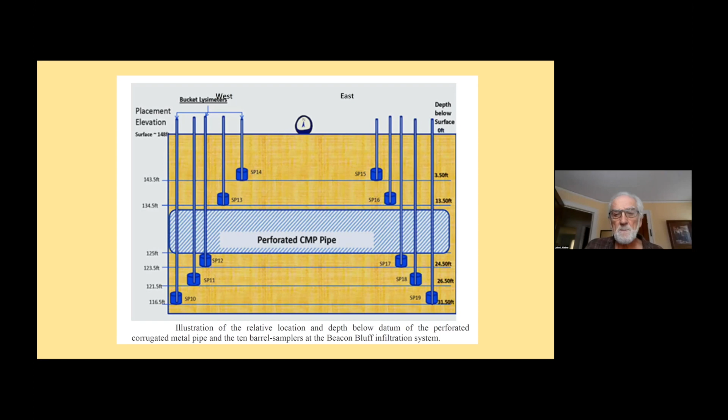So we had runoff coming from parking lots, runoff coming from the sheep pasture, the manure on the site, and so on like that, because they had horses out here and all that kind of thing. And there was a compost site just to the north. And so the water infiltrated then into those basins.

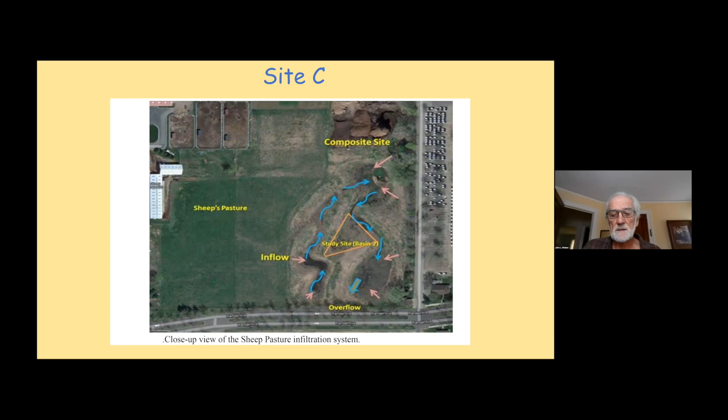All right, so just to give you an idea as to what the results look like, this was done during the period 2012 to 2013, and took about 155 samples total. These were analyzed for nitrate, chloride, total phosphorus, cadmium, a number of different metals that I'll refer to. So cadmium, lead, iron, and so forth. And then also for the Beacon Bluff site, we also looked at the total hydrocarbon content in the samples.

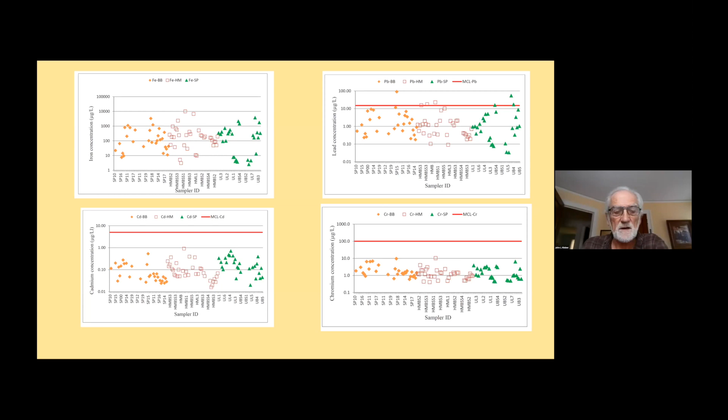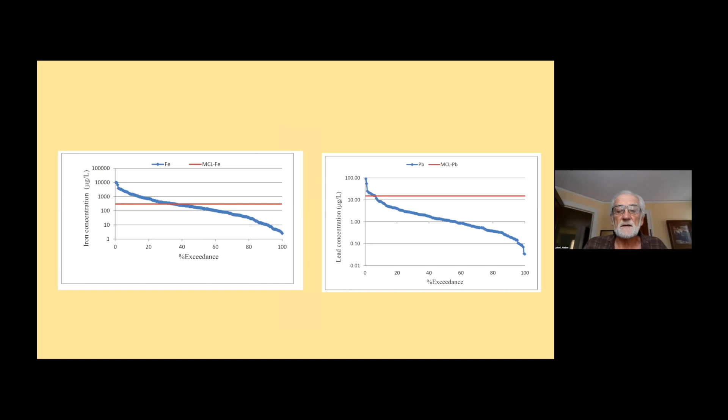Then for the metals, of course, there's no MCL for iron. There is for lead, and you can see there's some exceedances there. But for all the other heavy metals, there were no exceedances of the MCL concentration. There is none for nickel, which I didn't show the slide for, but nickel didn't have any exceedances either. For the iron concentration, I show an MCL, but actually that just has to do with water quality and not necessarily for health effects. And then for lead, about 4% of the samples had exceeded the MCL for lead.

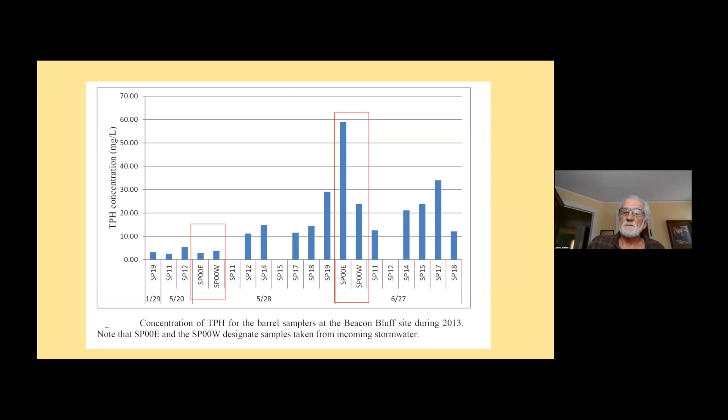And I'll just mention here about the TPH that was only done at the Beacon Bluff, and what was coming into the runoff into the infiltration practices, indicated by the red box, both in May of the year and then in June of the year. These are just two different events, and the thing is that we don't find any correlation between the TPH and the concentrations that are at depth, and there's going to need to be more work done on this.

So since I have to hurry here, I'm going to just give my conclusion. As I've already mentioned, chloride concentrations exceeded the MCL about 15% of the time. Nitrate was 4%, lead was 4%. And then copper, chromium, nickel, and so on, there was 0% exceedance. For total phosphorus, there was no MCL, but they were very high values.

Depth dependencies were poor. Most of the results of the study are consistent with results that are reported in the literature, and that report that I refer to is a good one to look at because there is an excellent literature review done in there by John Gulliver and Peter Weiss. And then, like I said, the TPH results were not conclusive.

So some recommendations for further study: need additional work on TPH as our results were not conclusive. Removal of bacteria and microbes was not studied here. There's been a lot of work done on that in laboratory studies. I think there needs to be work done also in the field. It wasn't done here, so I think that's something that should be looked at. And there is concern about viral cells. That was not looked at here as well, and that's something that probably should be done in the future as well. So I'll leave it there. Here's the reference, like I said, it's from 2014.